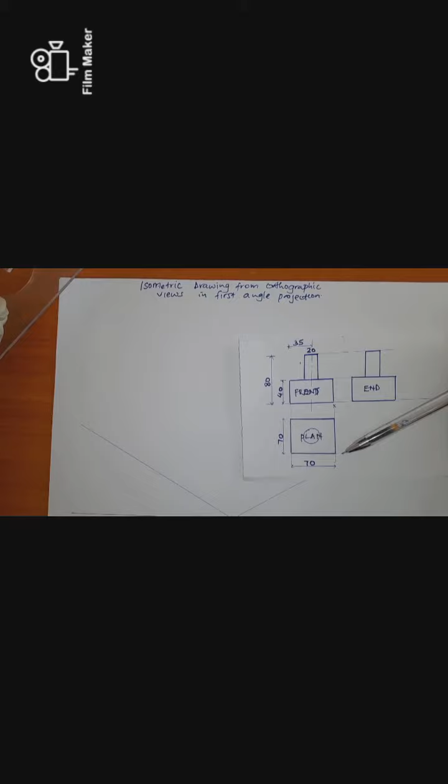So the first thing we have to do, we have to draw a block diagram measuring the base, which is 70 by 70, and then the vertical height of the block to be 80, out of which we shall now cut out the relevant part and get the expected drawing. Taking x as the lowest point, it means we are going to have point x here, and then we shall have 70 on this side and then another 70 on this side. So let's proceed.

We can draw a vertical there. So these lines are isometric lines, as you can see. Because we are drawing in isometric, we have to measure 30. Now on this side we are going to have 70, and also on this other side we are going to have 70. So from your measuring instrument we can get 70.

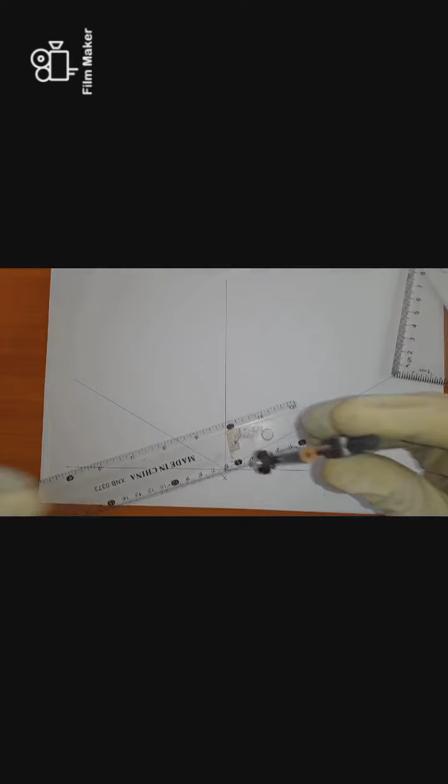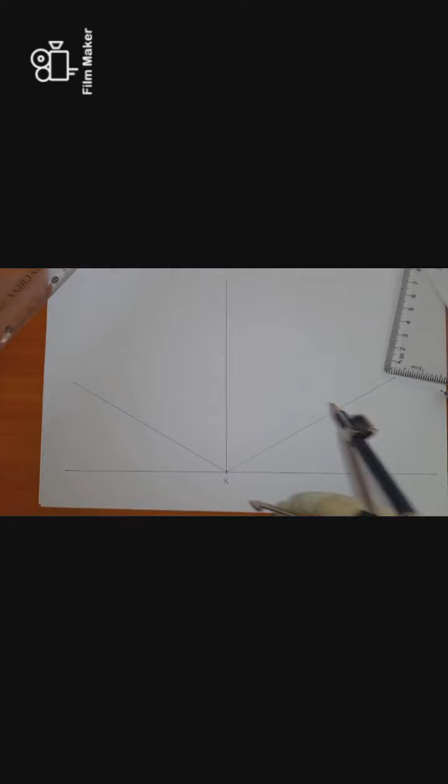You transfer it here and here. And the vertical height, the total height is 80. You just take your 80 and include it on the total height. So we are using the set squares and the T-square to join the lines. So 30 degrees. You just have to join them.

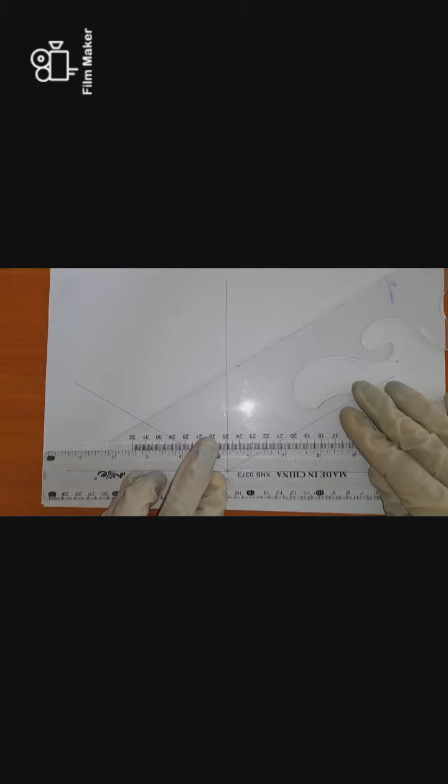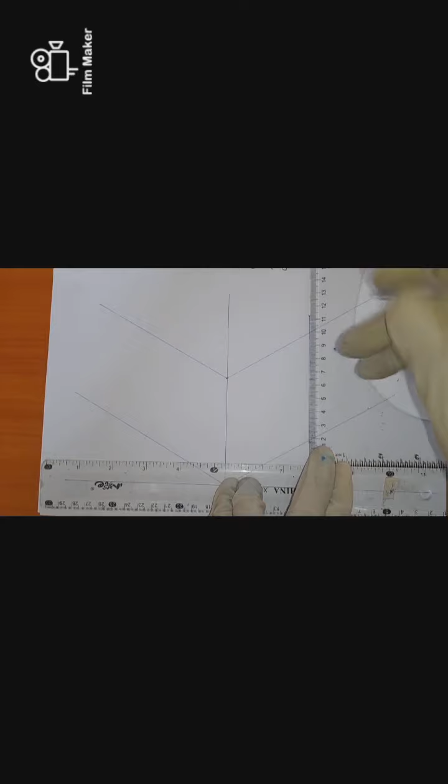So we can join this. We also join on this other side. 30 degrees. Then our vertical. Somewhere there. Then we have another vertical this side.

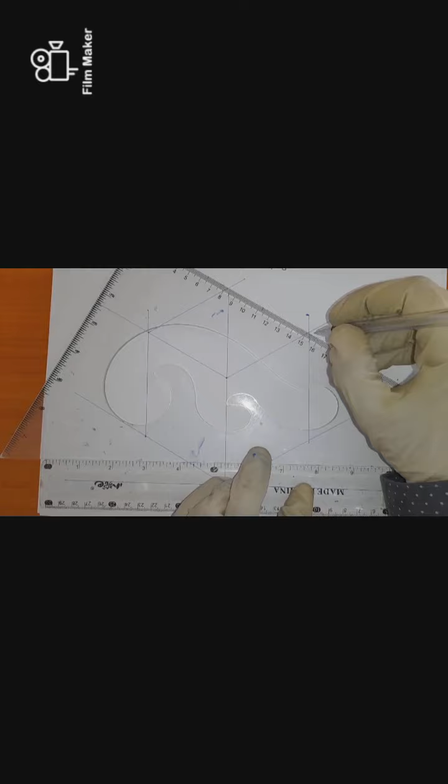Then you complete this other side. Then you bring and complete this. So there it comes. That is our block diagram. Now we can still extend because it's a block diagram.

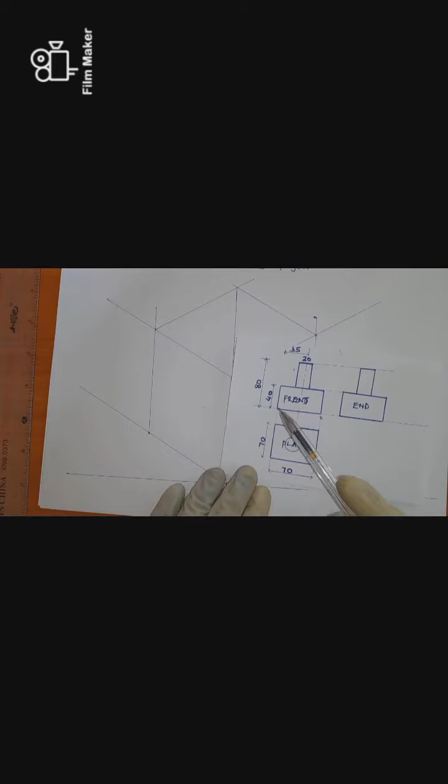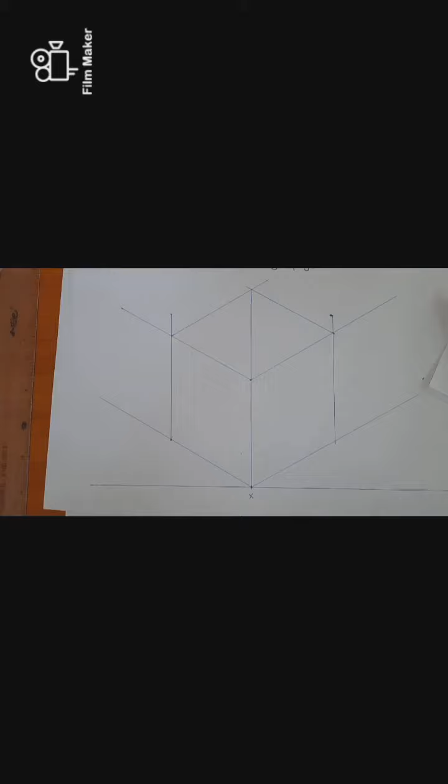Now, looking at this, you would realize that this cylindrical extension is extending from the 40th mark on the frontal part. So we have to measure our 40th. We establish a plane somewhere in the midway, where our cylindrical part can be extracted from. So let's measure our 40th mark. Just measure 40 and you put it here. So this is our 40th mark, this is our 40th mark.

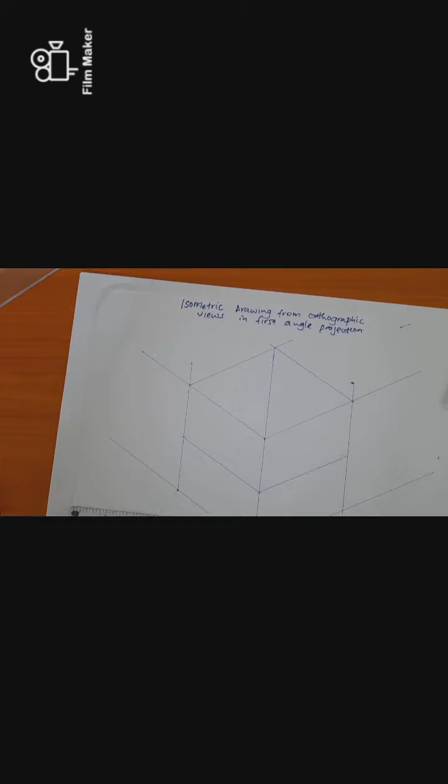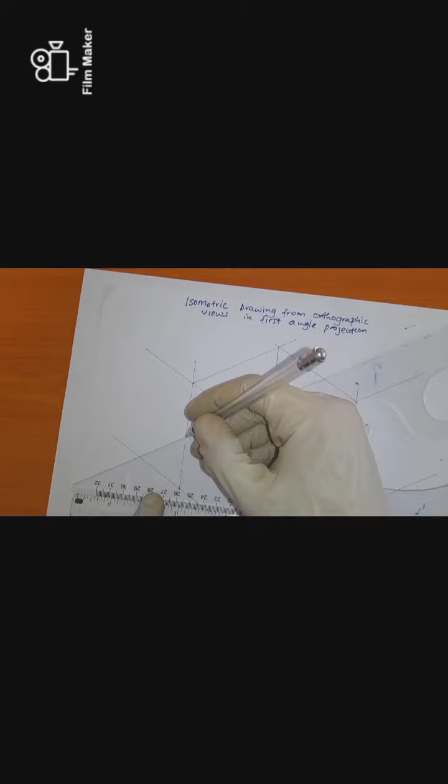Then we draw that plane. Just join the plane. So with your set square, your T-square, you can include this. Then also include that. So on that plane, we are going to have our cylindrical part.

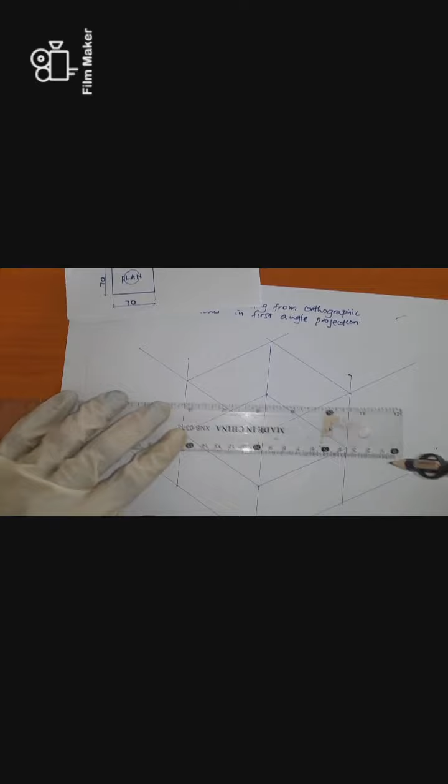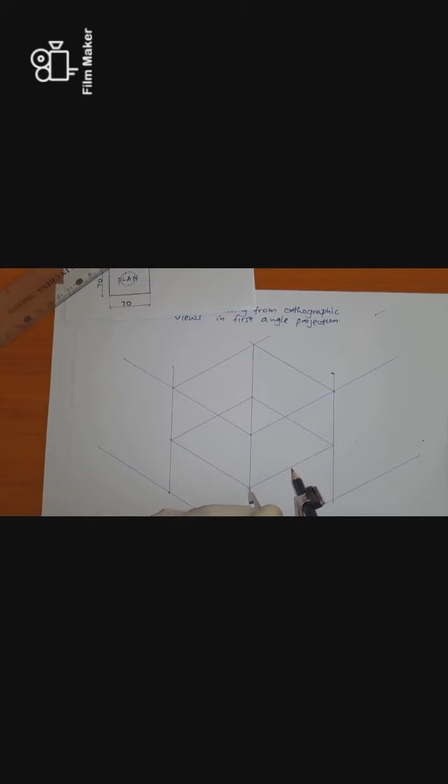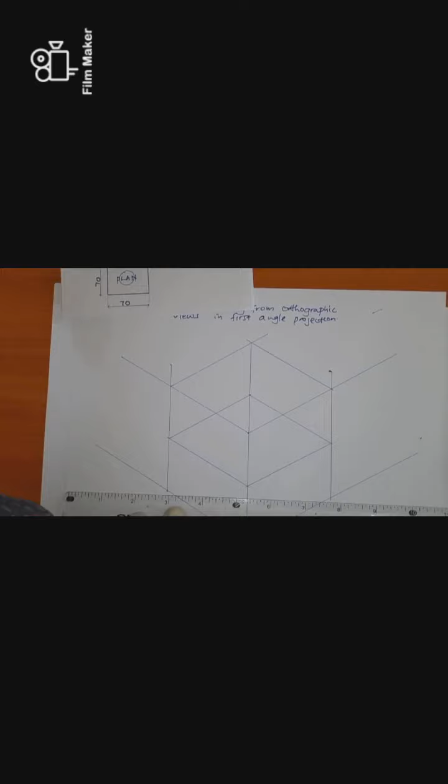As you can see, this cylinder is in the midway at that 35 mark, because this is 70, the midway is 35. So we are going to have the center lines, which measure 35. That is the center line. So the center line is somewhere here and also here. So we have the center lines using your T-square, your set square, and establish the center line.

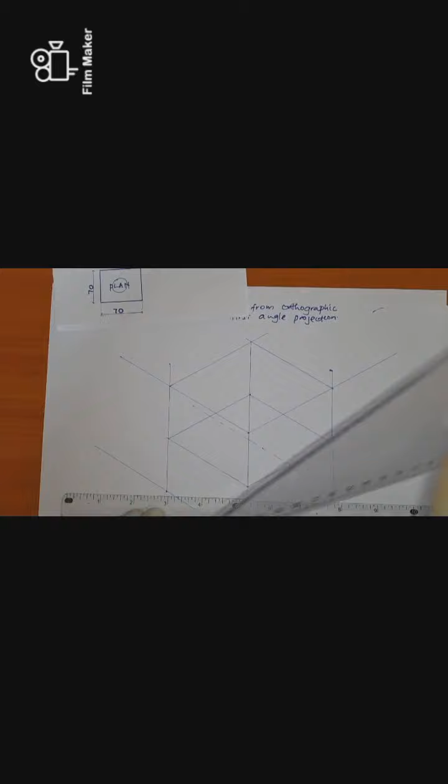It's 30 degrees because it is parallel to the base. Then also we have another center line starting from there. So that's the center line. Of course, this is the center point.

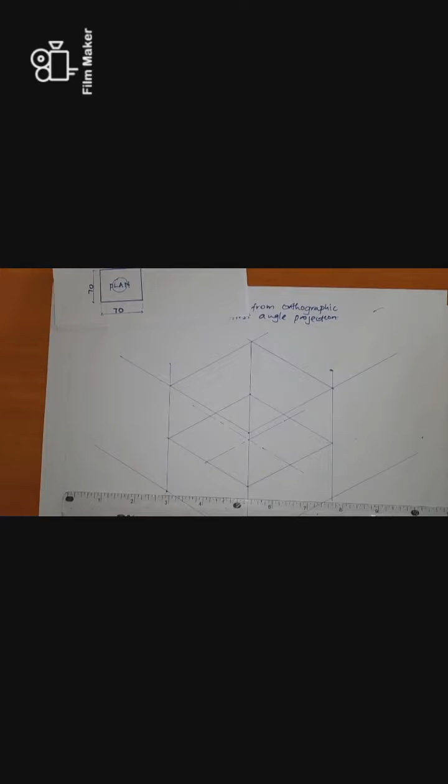Now, this cylindrical part, now we want to establish, this is the center. We are going to have a rhombus. This rhombus here, as you can see, the diameter of our circle is 20, our cylindrical part is 20. So that means we are going to have a radius of 10, 10, 10 each. So we measure 10.

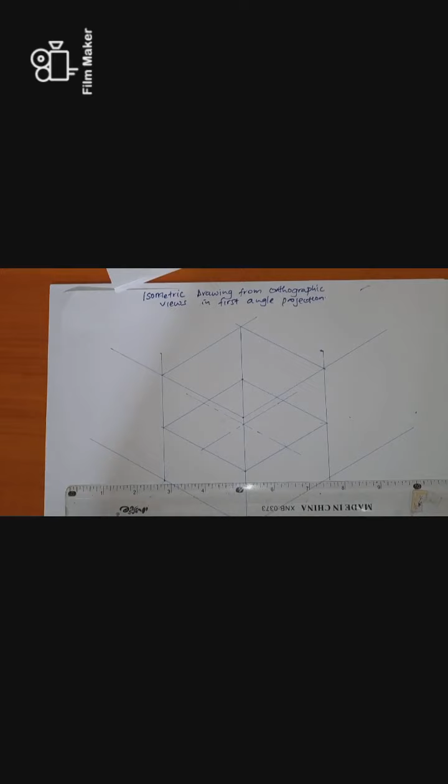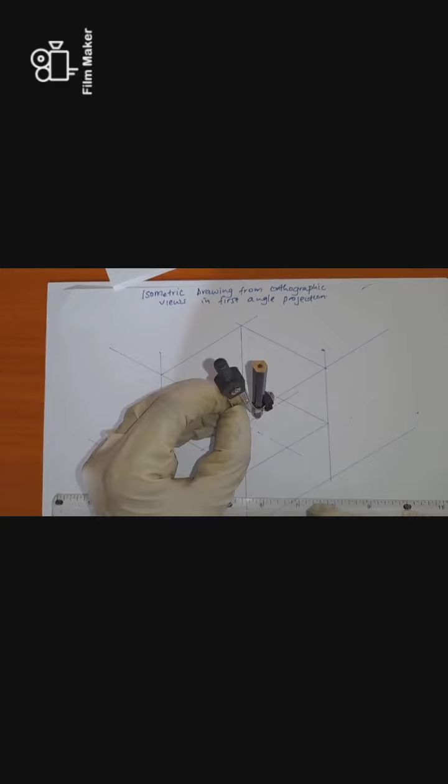So you have to measure 10, 10, 10, 10. So we draw a rhombus. This rhombus here passes through those points and also passes here.

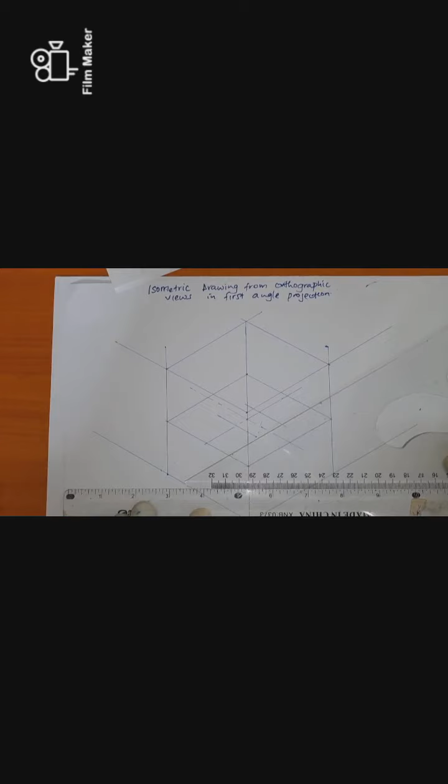Then we can bring this rhombus, bring it, okay. That's the cylinder we are drawing. Now you'll realize that the same thing we have done at the base would be the same thing on the top, because the top also has the cylindrical shape. So let's just transfer what we have here on the top part.

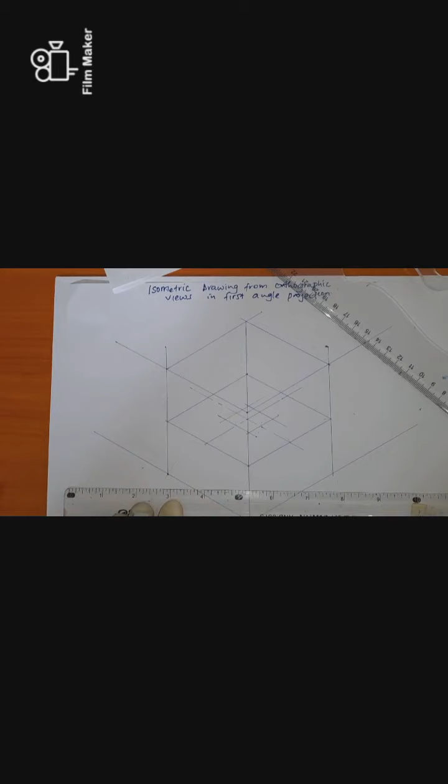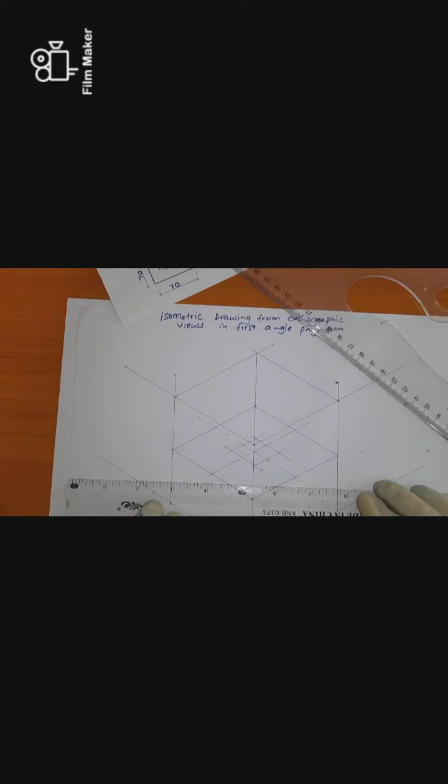We can use a compass to transfer it here, then here, then again, you bring this, you want that center line, then again bring this, complete this. You realize that this is another center.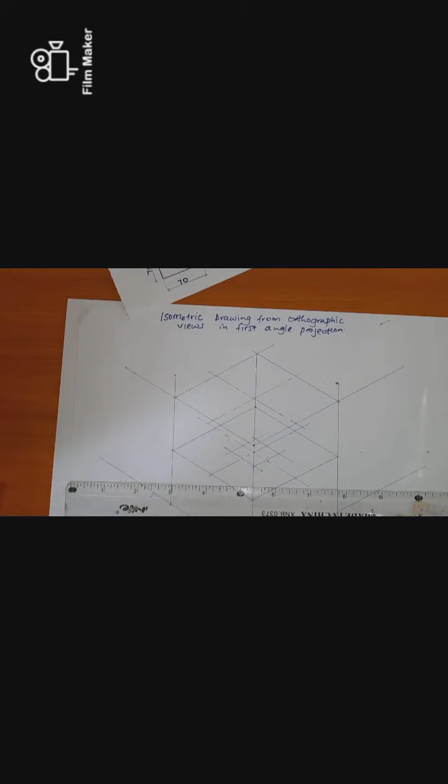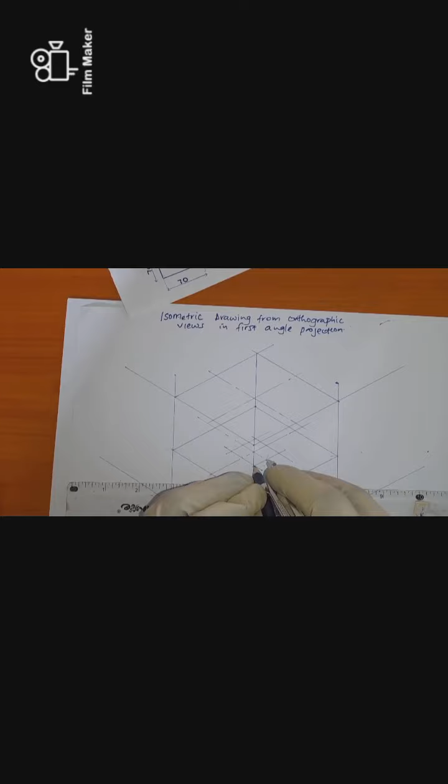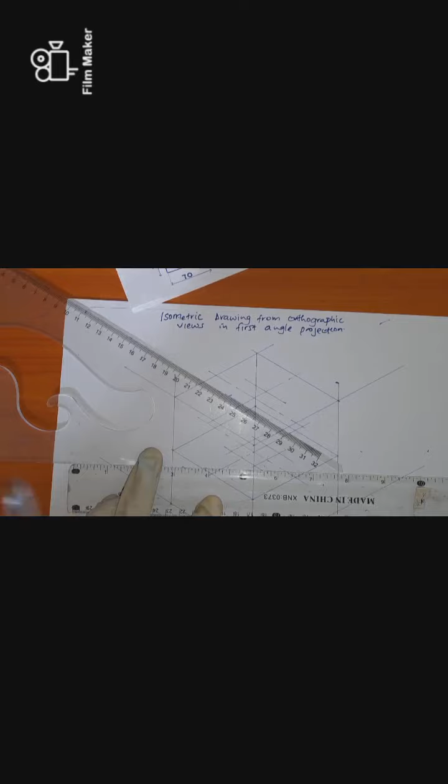So we just bring these dimensions of our rhombus back here, there, here, and here. Then again you join. Join them. There it goes. Bring this. There it goes. Then again include this other side. So this, and then this.

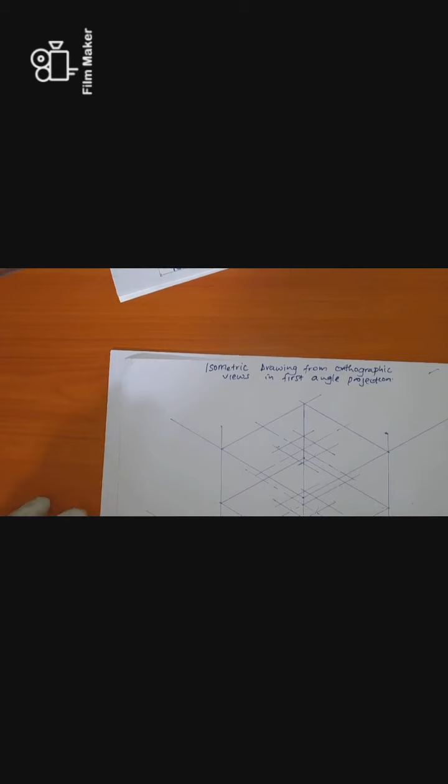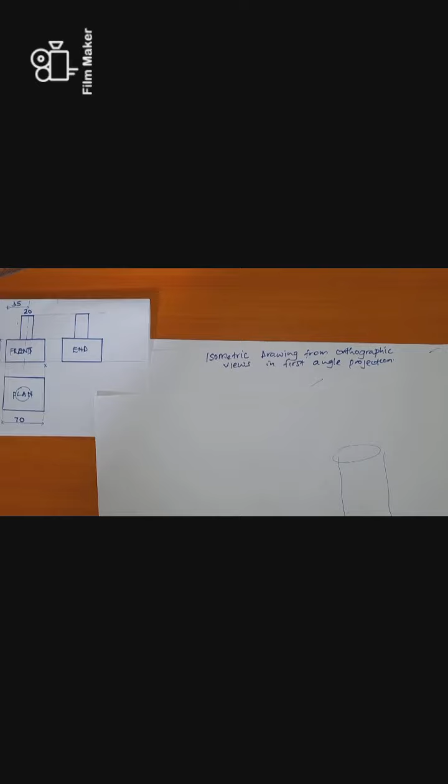Okay, so this cylinder is going to be put such that the circular base is inside that rhombus, and the top part of the cylinder is in that part. So if you are drawing it, you realize that the cylinder will assume such a shape. Let me show you. Because it is in isometric, that's why it will appear that way. So let's draw the top part.

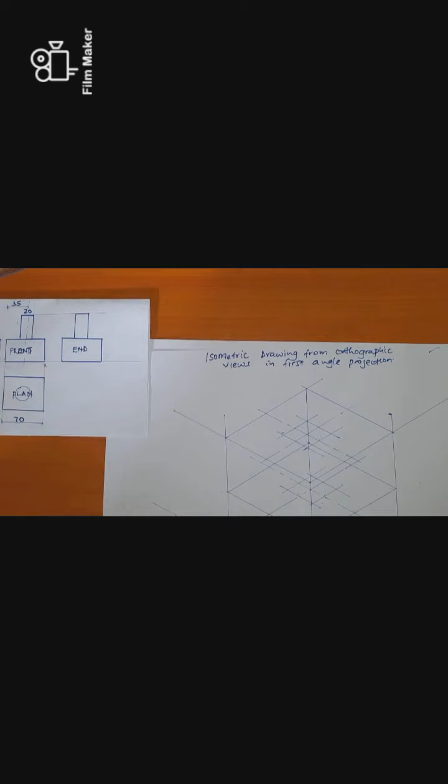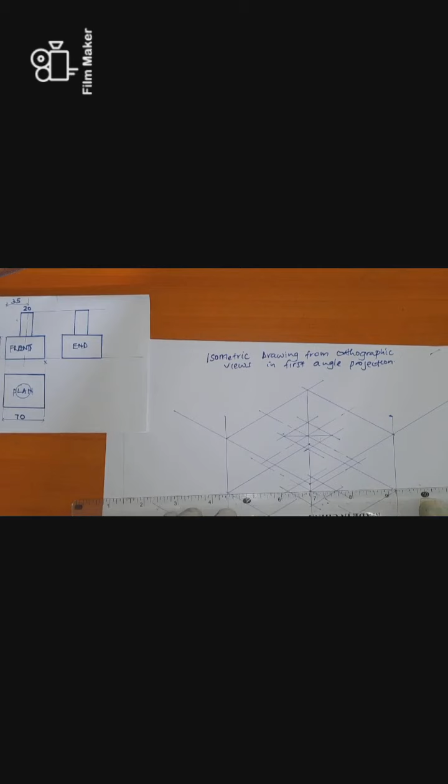We are going to join the longest diagonal. We join the longest diagonal. Of course, this one will still be the same thing down here. We join the diagonals. Now we are going to have some centers, but before we have the centers, we shall join this midpoint to that point, this midpoint to that point. So we can join this midpoint, also join this midpoint. Okay.

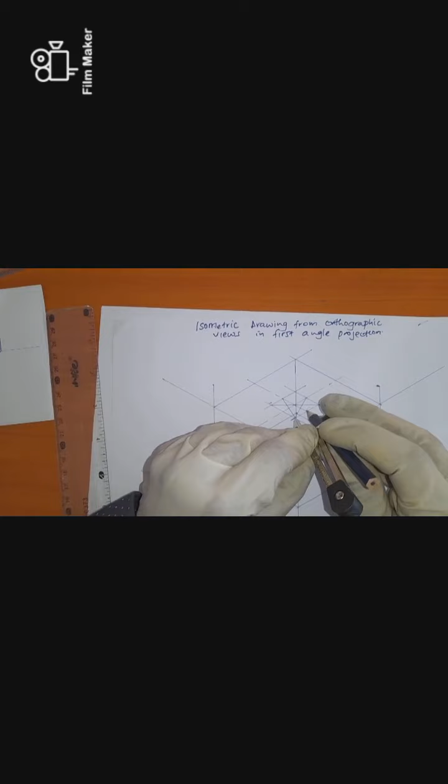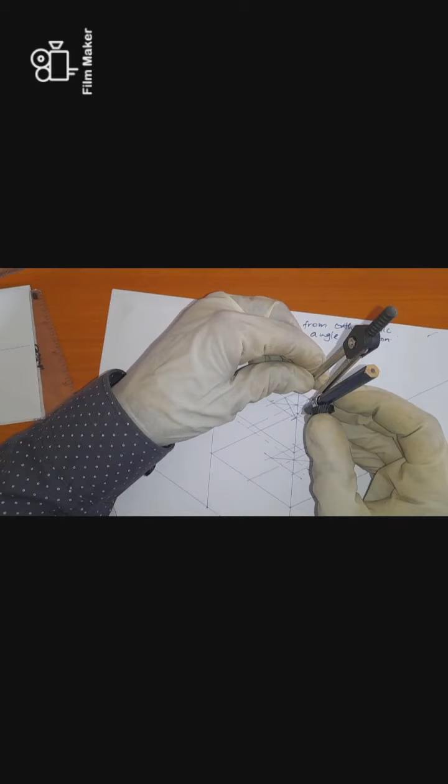So with your compass you can have the centers. The first radius is here. We take this up to that point, then you complete our circle. We come back here, we complete, because it should be the same radius. Just come here, you pick it, then you come here again, complete that.

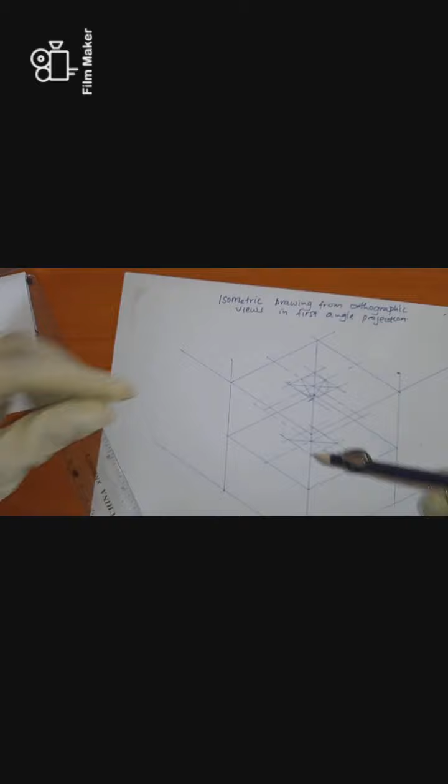Okay, then now we want the other side. Take the smaller radius, then you complete your circle. Okay, and then you come and take this other, complete this. That is the circular top.

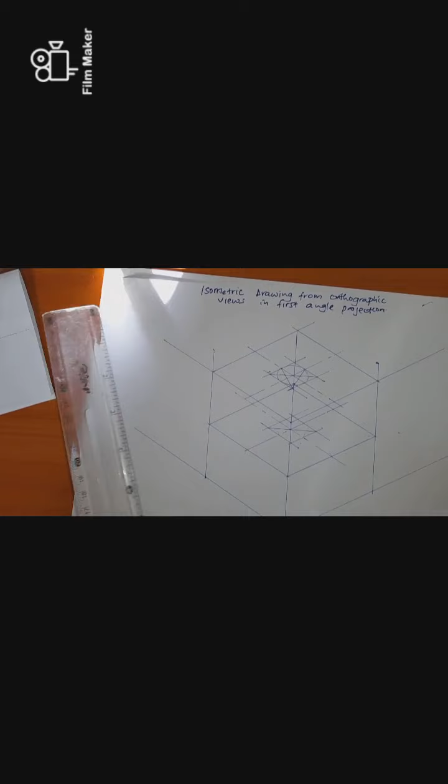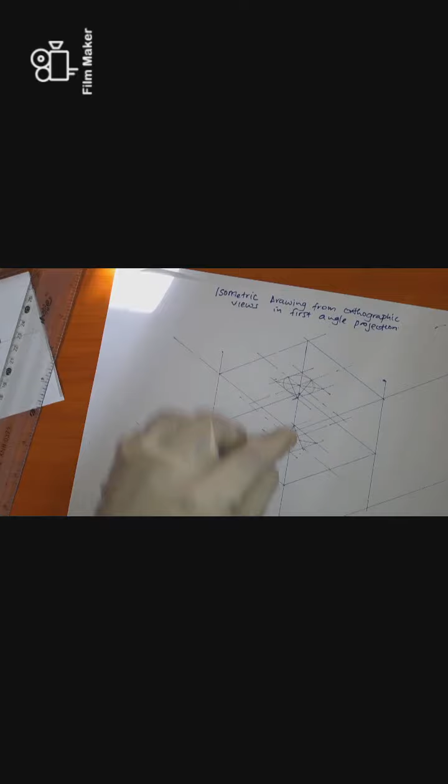Now at the base, we are only going to have this side. So that means we can still join the longest radius and this midpoint. Okay, not necessarily that, we can still join this midpoint. It's the same thing, it's only that I want to draw this curve, and that's why I would join the other midpoint from the other corner. But it still applies even if you join this way, you will still take the same radius, but you stand on the other side. So this radius here is what I'm interested in, to give me this arc.

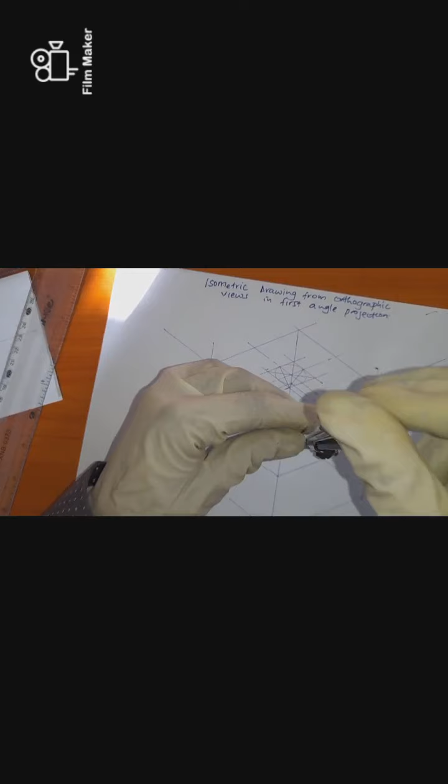Okay, once you have this arc, of course you are going to have this one to draw some bit of the arc from here, of course we are going to have a tangent. It's not going to go so far, just have some bit of it. Again on this other side, just some bit of it. Get the point? Then we are going to join using tangents from the top part.

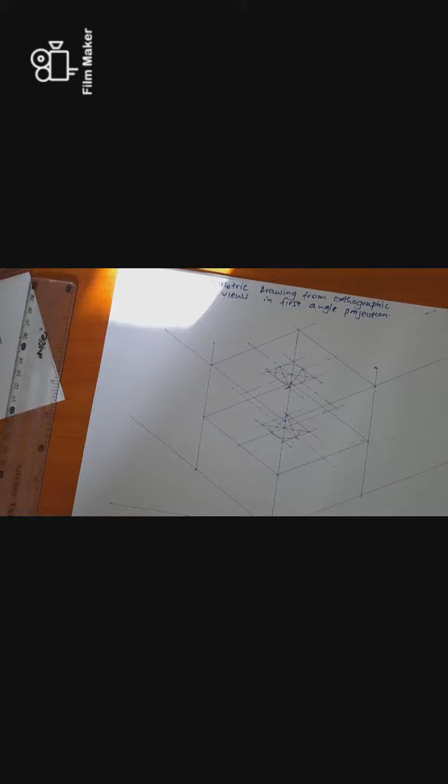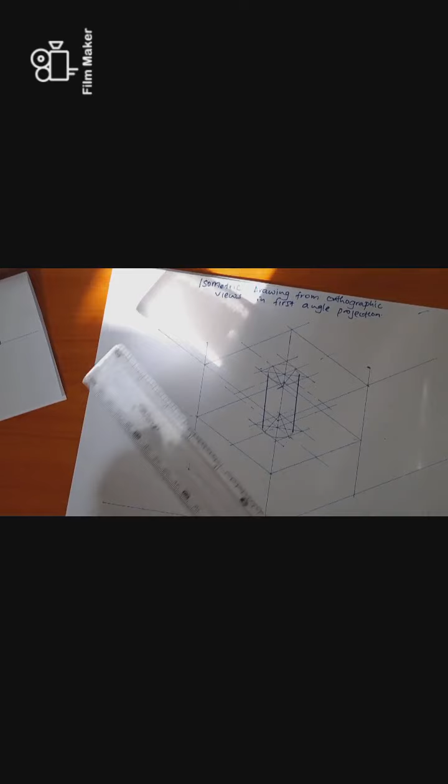So we join this. Then we join this. And then of course we shall join this. We join all the necessary lines that are expected to be joined. So we continue.

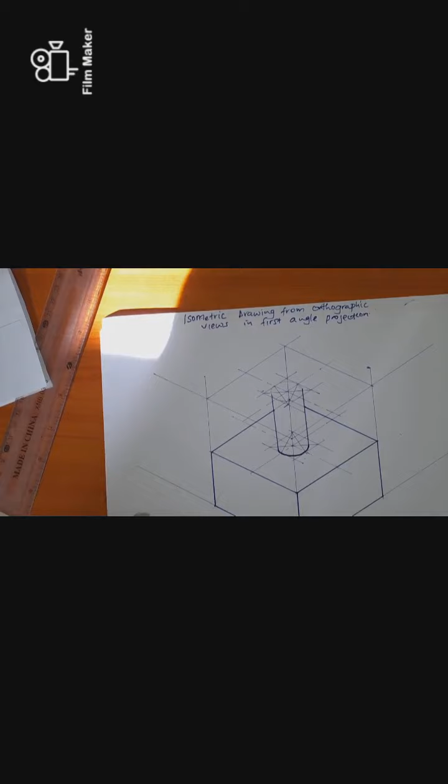Now also, in this case, allow me to use freehand to join the curve so that at least it's more clear. Just for today. Just allow me for today. Join that. I'm trying to make it more clear. So this is what we expected to draw.

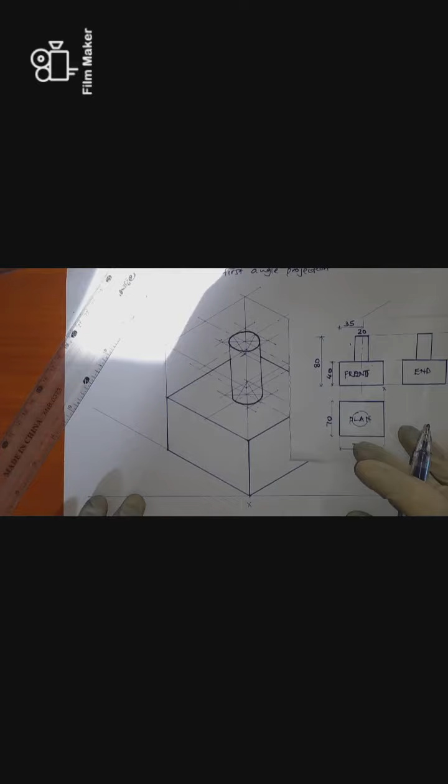Out of these views, you would realize that we have the frontal part, the end that gives me this, and the plan from top that gives me a circular part and a rectangular cuboid.